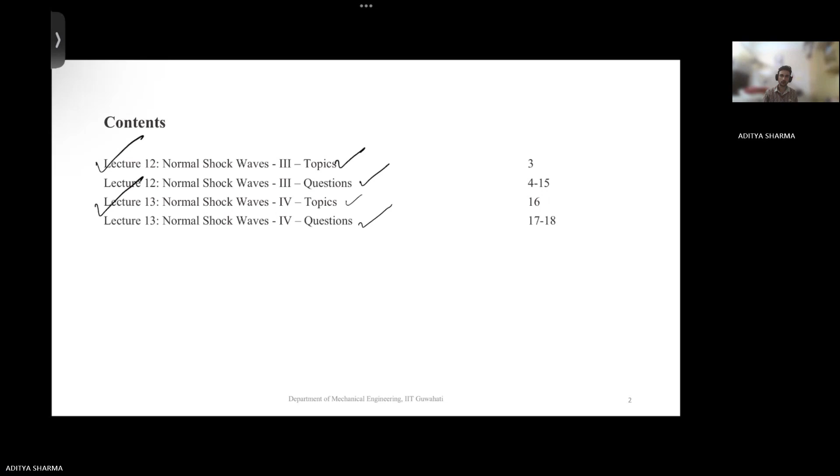So first we have limiting Mach number. It talks about Mach number across your normal shock. What is the limiting value of your Mach number? So in lecture number 12, first is your limiting Mach number.

If your Mach value is too high, in that case your limiting value of M2 is this, for gamma equals to 1.4. So even if your Mach is too high, your M2 value will not fall beyond this. This is the limiting value of your M2, and the formula for that is under root of gamma minus 1 by 2 gamma.

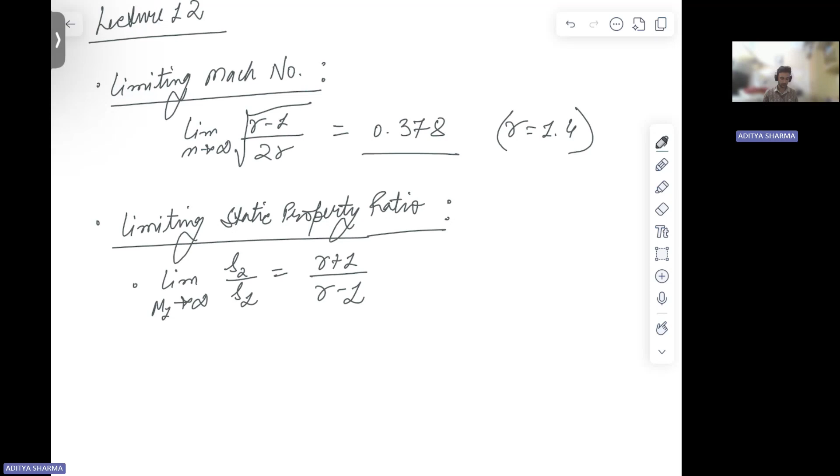So your static density ratio, rho 2 by rho 1, its limiting value is gamma plus 1 by gamma minus 1. And for air, it comes out to be 6. Mach number's limiting value is 0.378, and static density limiting value is 6.

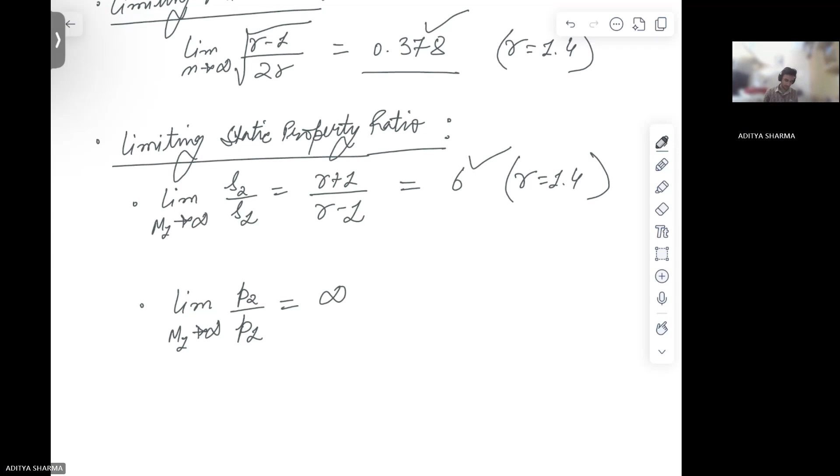Then for your static pressure, this is infinite. So as your Mach upstream of your normal shock is increasing, your static pressure ratio will reach infinity. Same is for your temperature also, your static temperature.

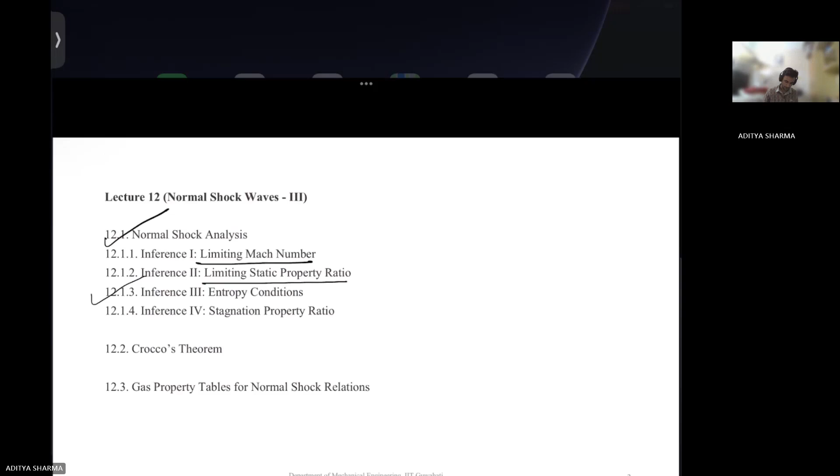Then third is entropy conditions. If your entropy change is less than 0, it means the process cannot happen. Entropy change has to be greater than equal to 0. So this is your entropy change across a normal shock wave. If your entropy change is positive, it means the process can happen. But in the subsonic case, you will see that this entropy change is negative, which means your shock wave will not form in case of your subsonic flow.

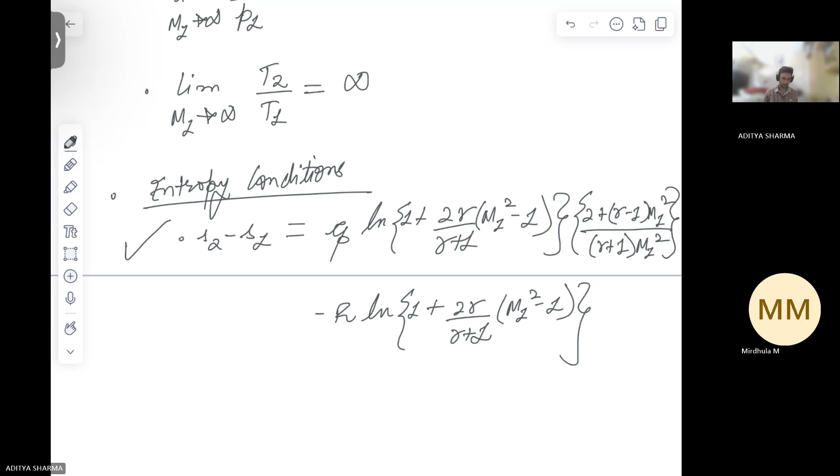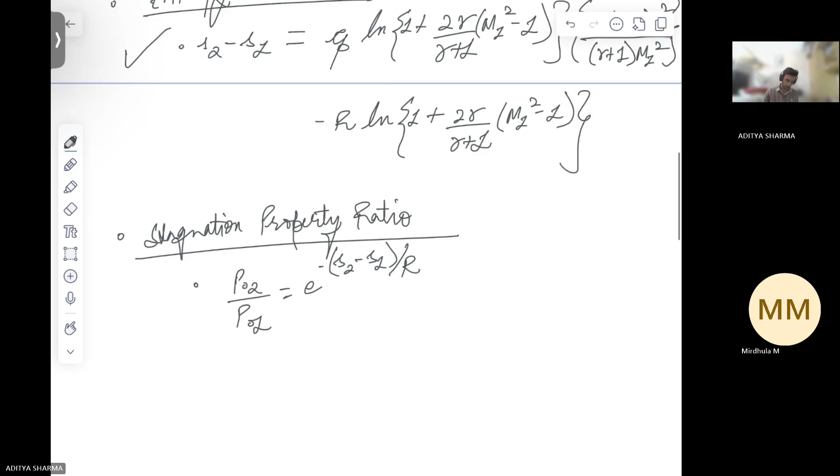Then in your fourth inference, you see stagnation property ratios. For your stagnation pressure, you have this formula. So across the normal shock, what happens to your stagnation pressure? You have pressure loss. In your total pressure, your static pressure rises, but there is loss in total pressure.

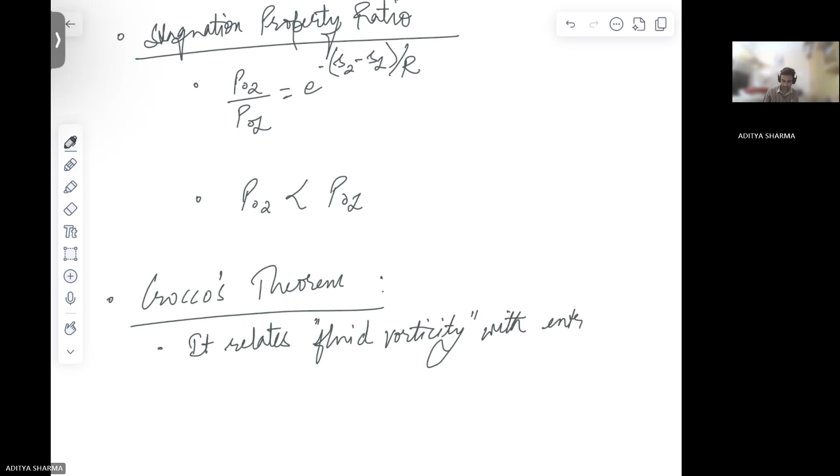So this is about inferences. Then Crocco's theorem has been discussed. Now, what does your Crocco's theorem say? It basically relates your fluid vorticity to your entropy change. So it relates your fluid vorticity with entropy change. It basically says that if there is some change in entropy, in that case your vorticity in fluid will be there, circulation, some type of circulation will be there, rotation, some kind of rotation will be there. And mathematically, it is written this way.

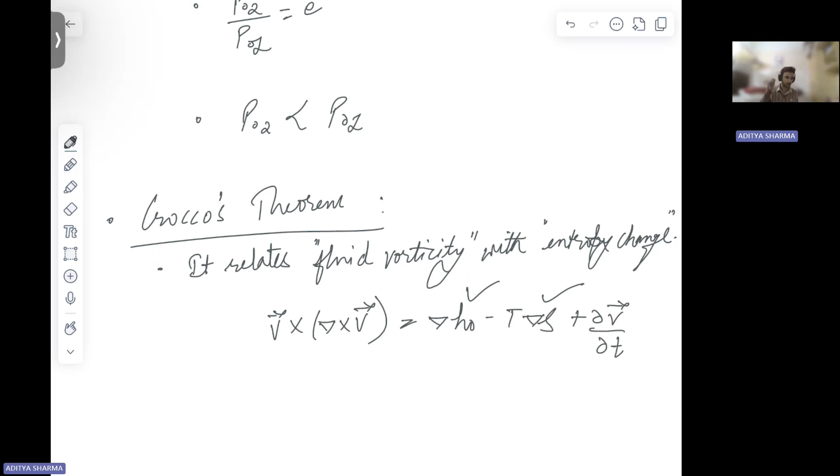This entropy change and enthalpy change, total enthalpy change, so this is your Crocco's theorem. Then gas property tables for normal shock relations, this has been discussed, and there are numericals based on it.

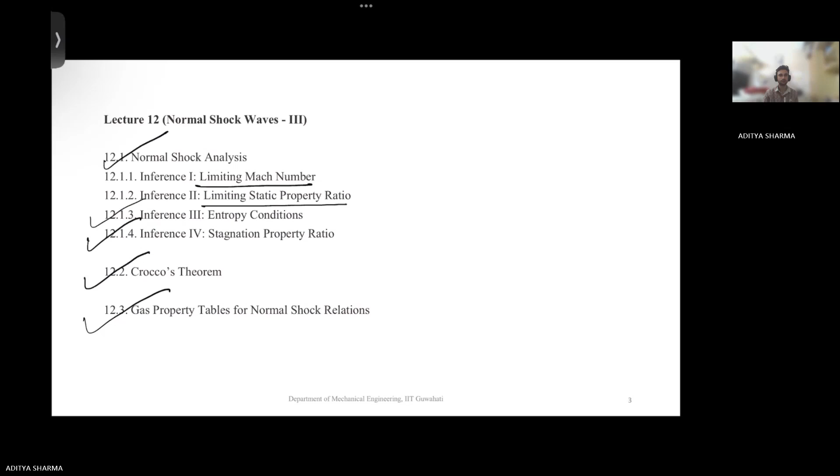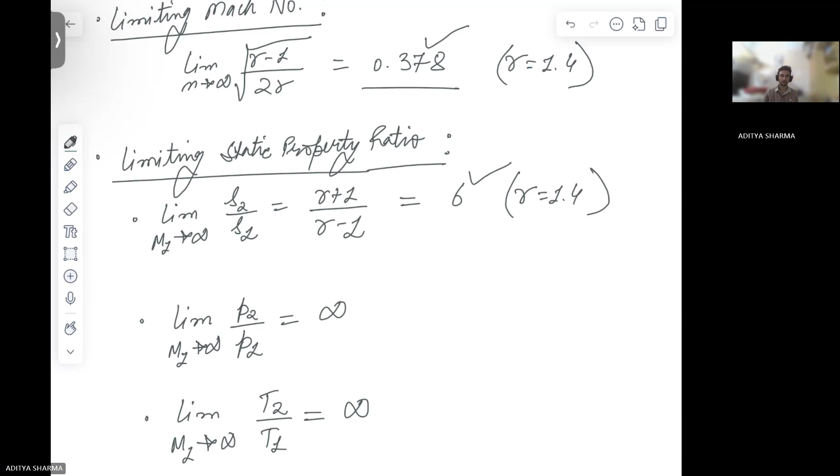So these were topics related to lecture number 12. Limiting Mach number first was, which is under root of gamma minus 1 by 2 gamma. Then limiting static property ratio is there. So for your density, this ratio is 6 with air. For pressure and temperature, this goes to infinity.

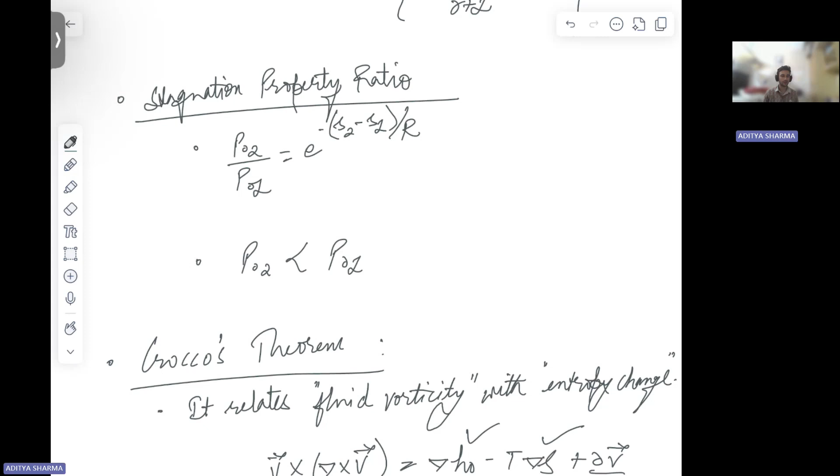Then entropy conditions, this has been discussed. After that, stagnation property ratios, these have been discussed. Then Crocco's theorem has been discussed, which basically relates your entropy change with your fluid vorticity.

Then we have questions. Let's see the questions one by one. So first question is this. Please read the first question and try to answer this question.

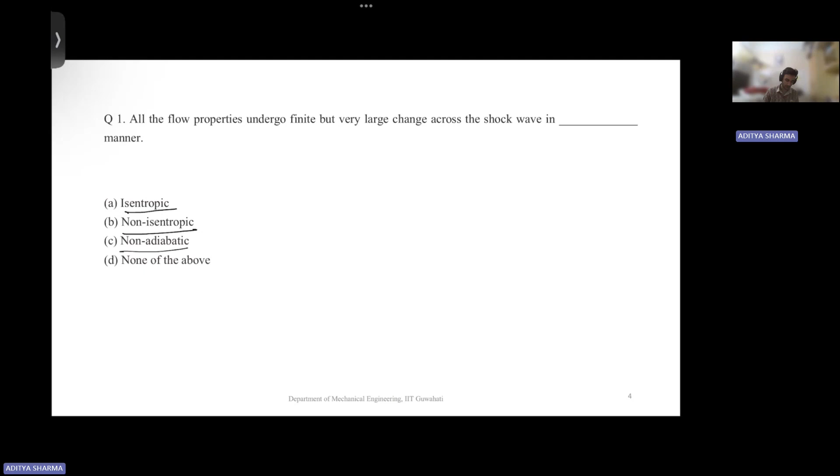So first question is there. It says that all flow properties undergo a finite but very large change across the shock wave in a dash manner. Based on the options, let's see which one is correct: first is isentropic, second is non-isentropic, third is non-adiabatic, fourth is none of the above.

So if you pick up entropy, what happens to entropy across a normal shock? Does it remain the same? Let's see these entropy conditions.

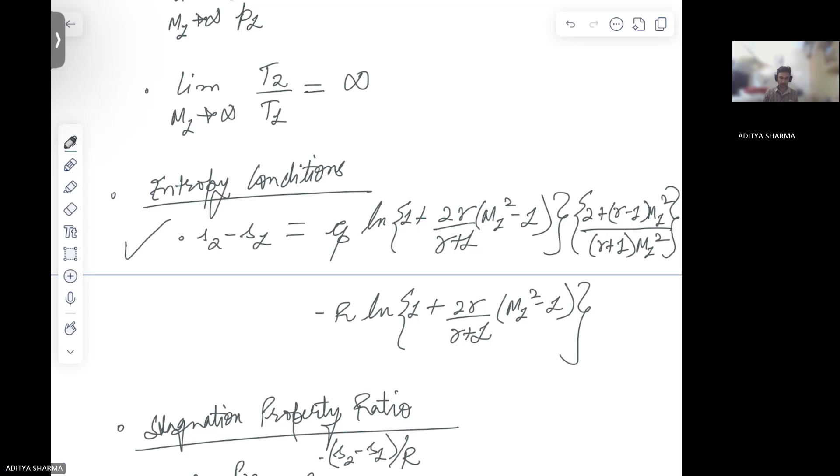For Mach greater than 1, for supersonic flows, entropy is going to increase across the normal shock, which essentially means that across the shock wave, the change is not isentropic. Isentropic means entropy is constant, and for shock waves this is not the case. In that case, B comes out to be the correct answer to this question.

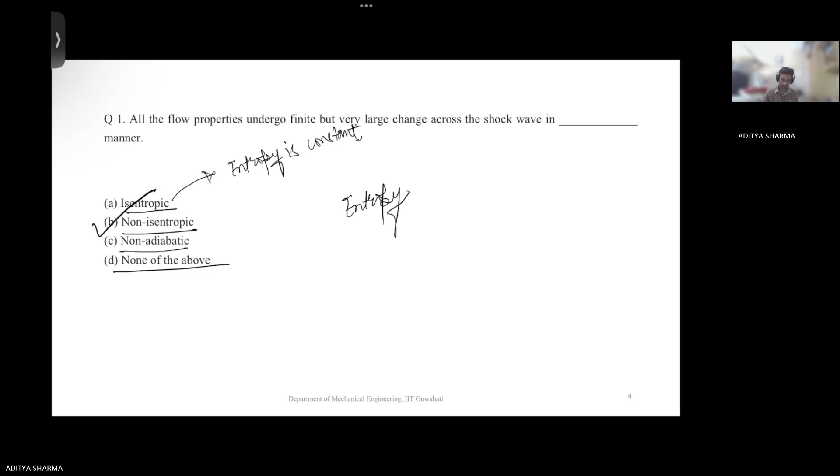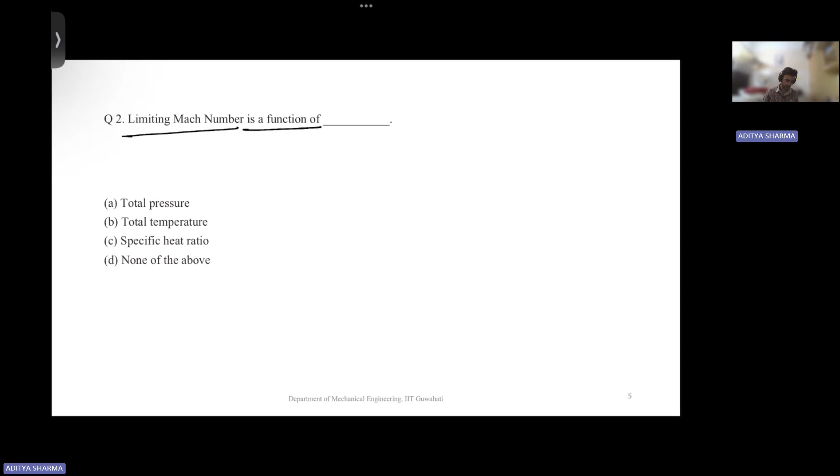Alright, moving on to next question. Question number 2: limiting Mach number is a function of dash. Please try to give an answer: is it a function of total pressure, total temperature, specific heat ratio, or none of the above?

If you see the formula for limiting Mach number, this solely depends on your specific heat ratio gamma. So looking at the options, C comes out to be the correct option, right?

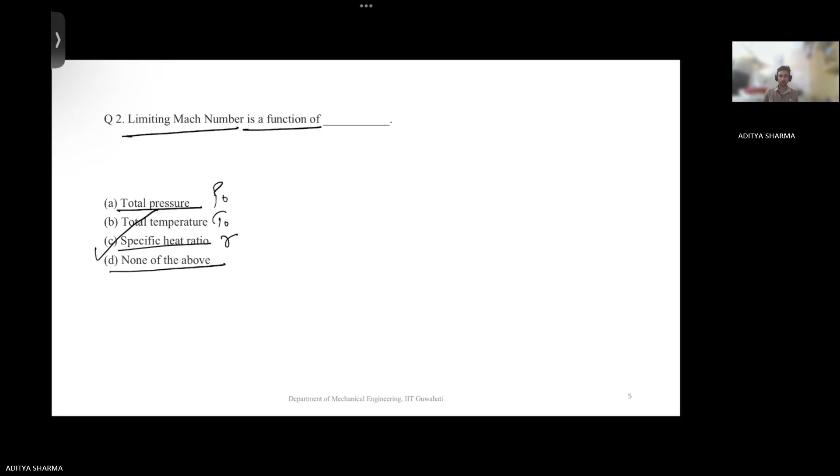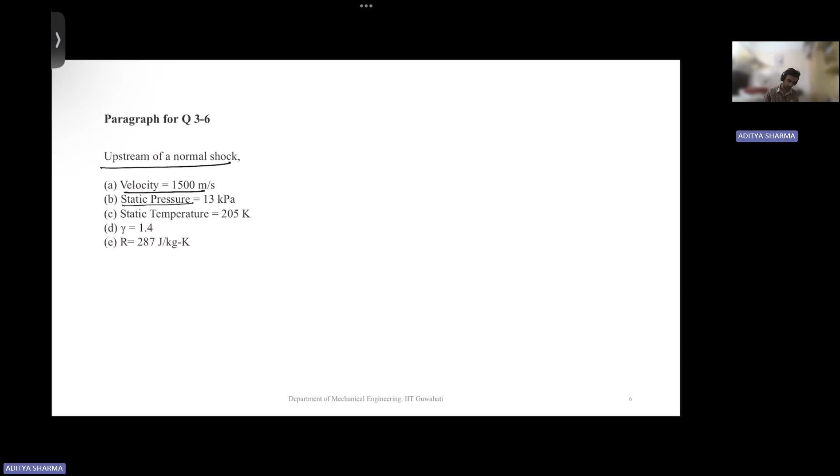Then moving on to next question. This data has been given for question number 3 to 6. It says that upstream of the normal shock, velocity is this, static pressure is this, static temperature is this, gamma is this, R is this. So this information has been given to us for question number 3 to 6.

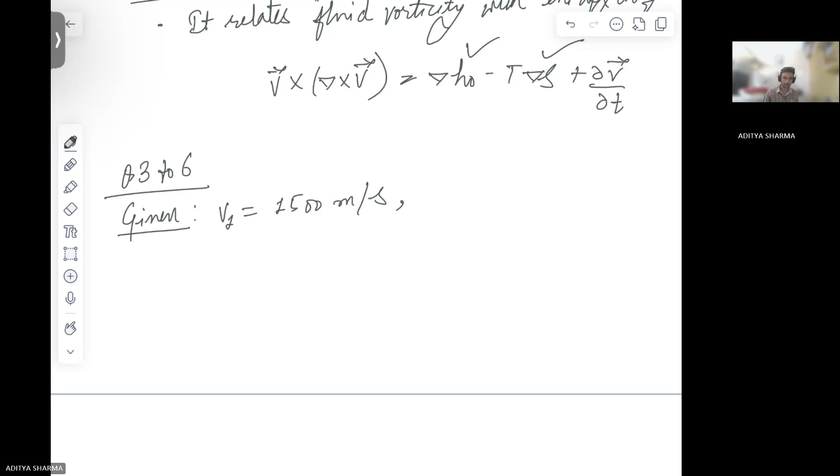V1 is 1500 meter per second. P1 is 13 kilopascal, that is this. Then temperature is 205 Kelvin. Gamma is 1.4. Then R is 287 joule per kg Kelvin.

Now from your Rayleigh relation, okay, here it says find the stagnation pressure downstream of the shock wave. It asks for P02, stagnation pressure. Now we have this relation: P1 by P02 is 2 gamma by gamma plus 1, M1 square, minus gamma minus 1 by...

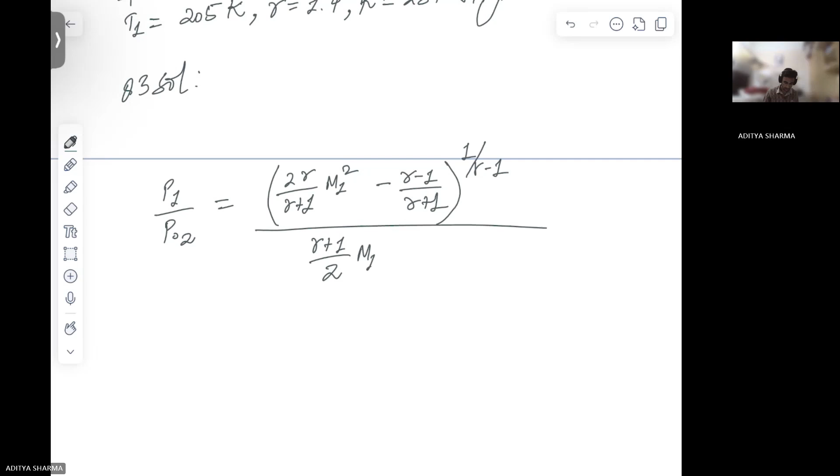So this we have, but now in this relation we want M1. Gamma we have 1.4 given. So to find M1, M1 is V1 by A1, right? Now V1 we have, A1 we need to find out. A1 is square root of gamma R T1, which is 1.4 into 287 into 205. If we work this out, this comes out to be 287 meter per second.

Then Mach becomes V1 by A1 equals 1500 divided by 287. If we calculate this, this comes out to be 5.23. So this is our Mach.

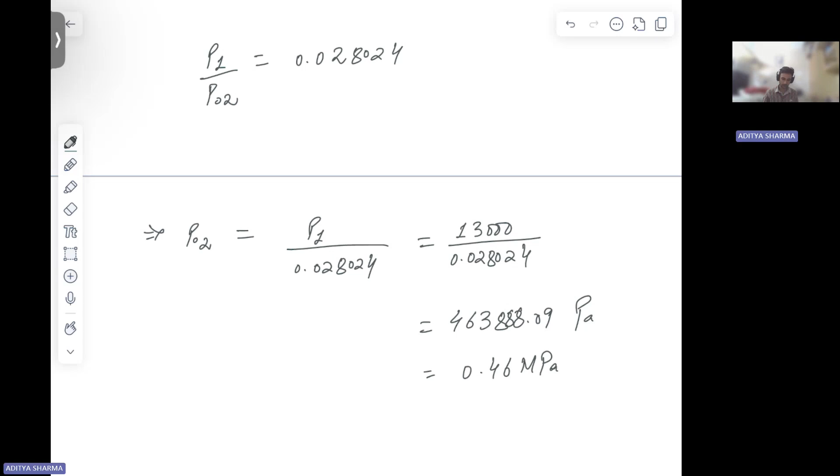Now if you calculate this, this comes out to be around 463888.09. Now if you divide it by 10 raised to power 6, you get 0.46 megapascal. Okay, so this is your answer to question number 3.

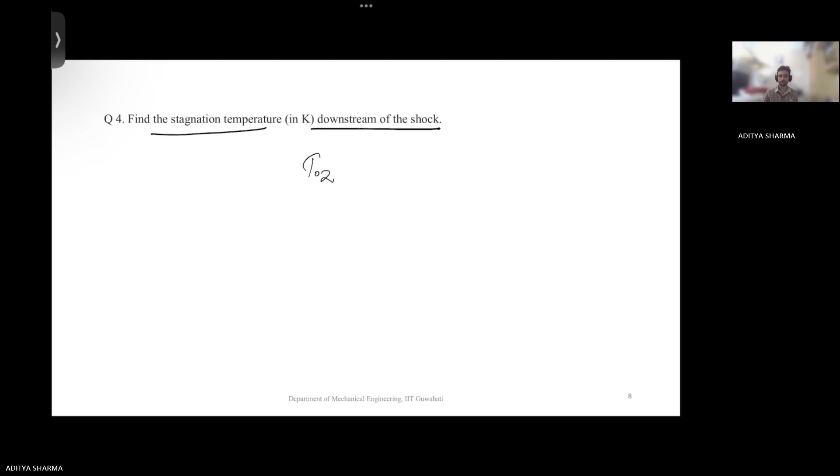Then we have the next question. Let's move on to next question. Find the stagnation temperature downstream of the shock. We need to find out T naught 2, question number 4. Now we know that for normal shock waves, the total temperature remains the same across the shock wave, right?

And from isentropic relations, T naught 1 by T1 is equal to 1 plus gamma minus 1 by 2, M1 square. M1 we have 5.23, we have calculated this. Then for T naught 1, we can write T naught 2, right, and T1 we can take on the right hand side.

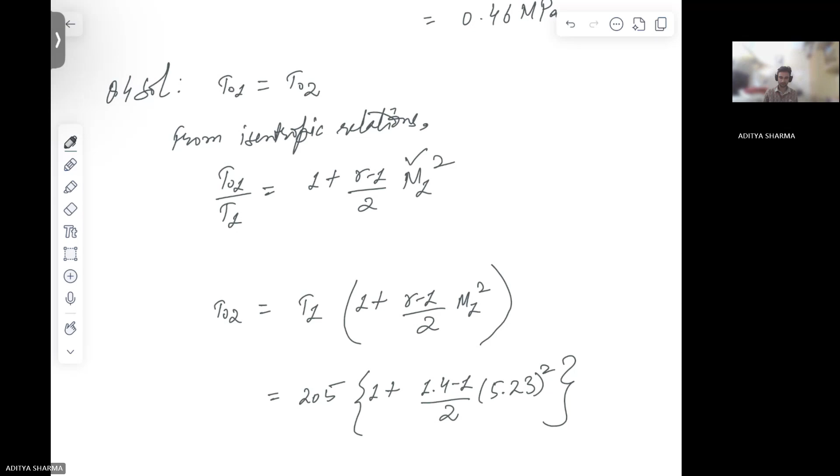Now we can place the values, so this we can do. Now if we calculate this, please calculate this, let's see what the answer comes out to be.

So this comes out to be 1326.46 Kelvin. So this is your total temperature.

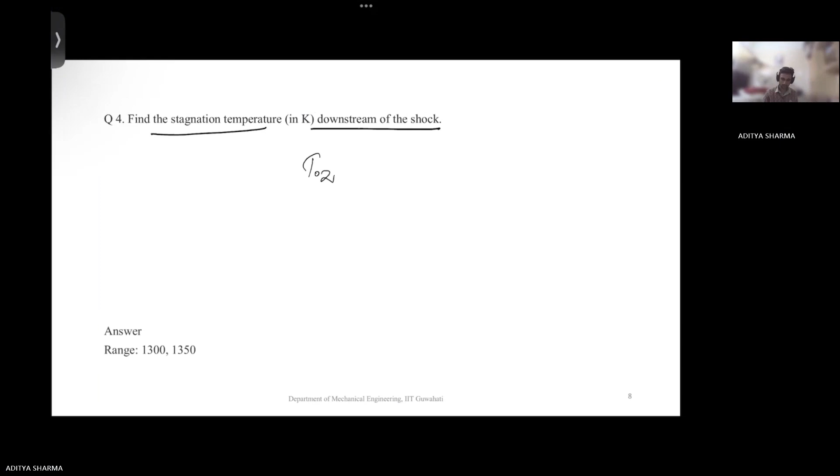So which relation should we be using to find out P2?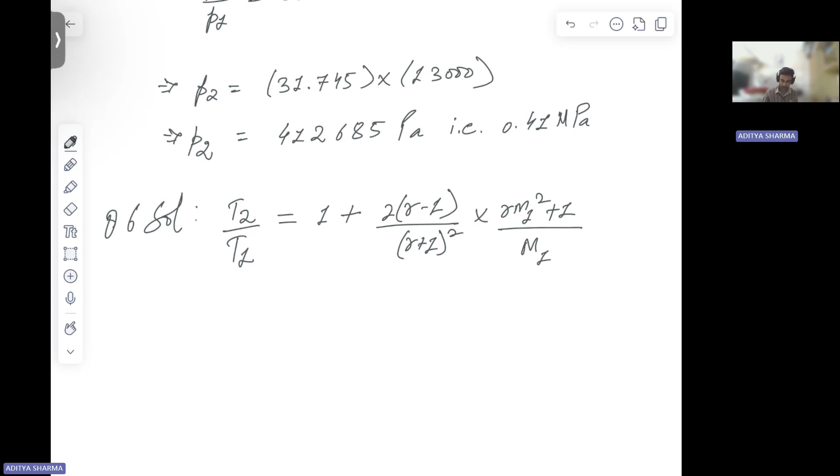So this is the relation that we are going to use: T2 by T1 is equal to 1 plus 2 gamma minus 1 by gamma plus 1 square, into gamma m1 square plus 1 by m1 square, into m1 square minus 1. So this is the relation that we are going to use.

Now placing the values, this is 2 into 1.4 minus 1 divided by 1.4 plus 1 square, into 1.4 into m1 is 5.23 square plus 1 divided by 5.23 square, into 5.23 square minus 1.

So this is this. This is 0.8 divided by 2.4 square into 1.4 into 5.23 square plus 1 divided by 5.23 square. Now please calculate this.

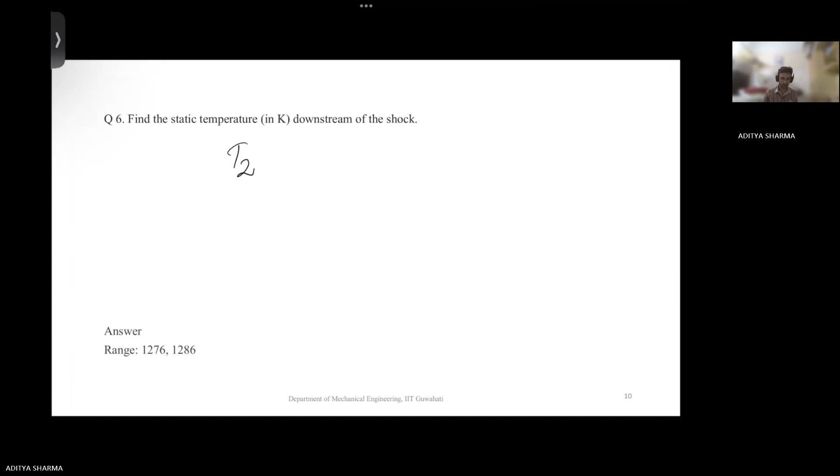Okay then, moving on to next question in that case. So this is the next question. So please read this question and try to answer this question. Then I'll discuss this.

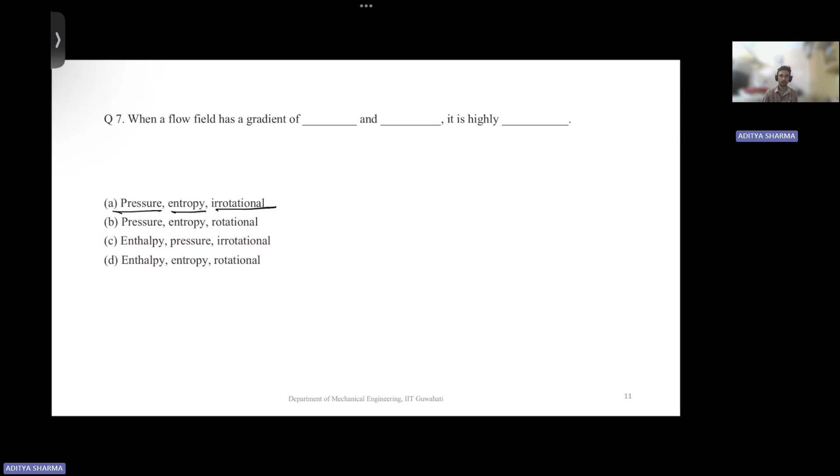Okay, so this question says that when a flow field has a gradient of dash and dash, it is highly dash. So four options are there. The first option says that when there is gradient of pressure and entropy, it is highly irrotational. So rotationality - where it has been discussed - that we need to recall. So second says pressure and entropy, and third option is rotational.

Then third option says enthalpy, pressure, and irrotational. Then your fourth option says enthalpy, entropy, and rotational.

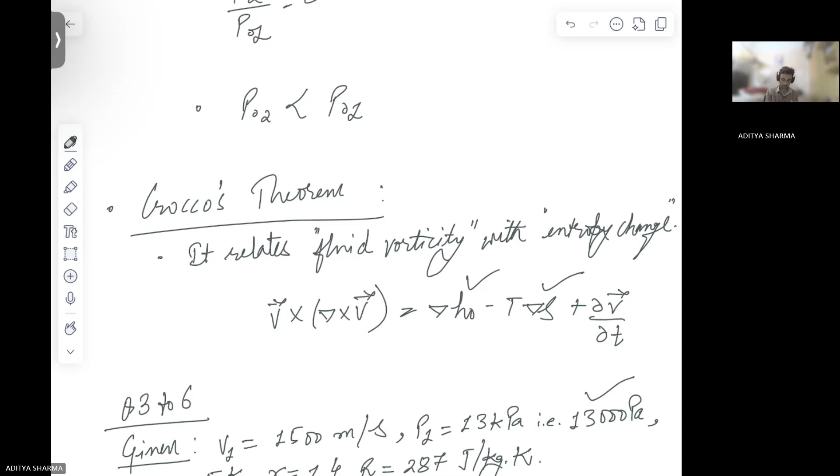So now I'll go back to Crocco's theorem. So what does your Crocco's theorem do? So if you see the mathematical expression of Crocco's theorem, there is change in your enthalpy and then there is change in your entropy. And this is related to the rotationality of the flow across the shock wave.

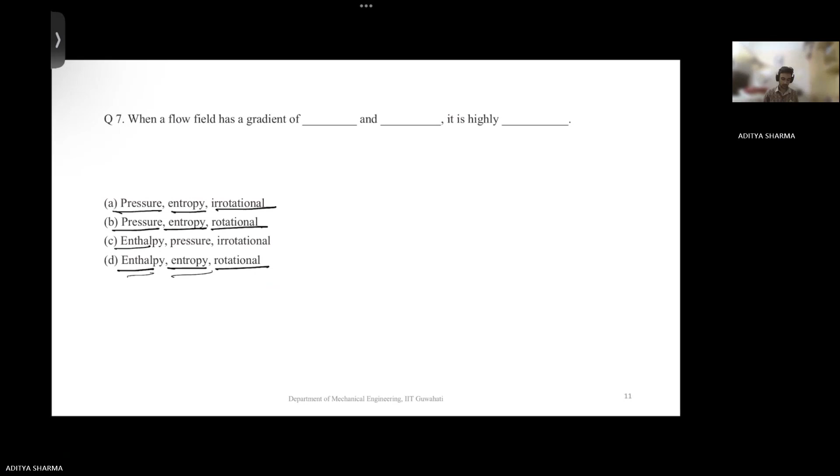So looking at this, if we see our options, if you see the D option, we have enthalpy here also, we have entropy also. So there are gradients of enthalpy and entropy in the expression of Crocco's theorem, which leads to rotational behavior of the flow. So this is question number 7. D is the correct answer to this question.

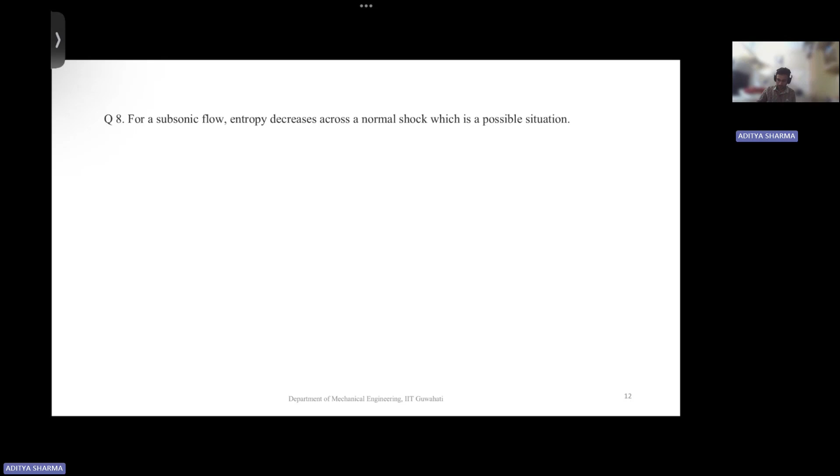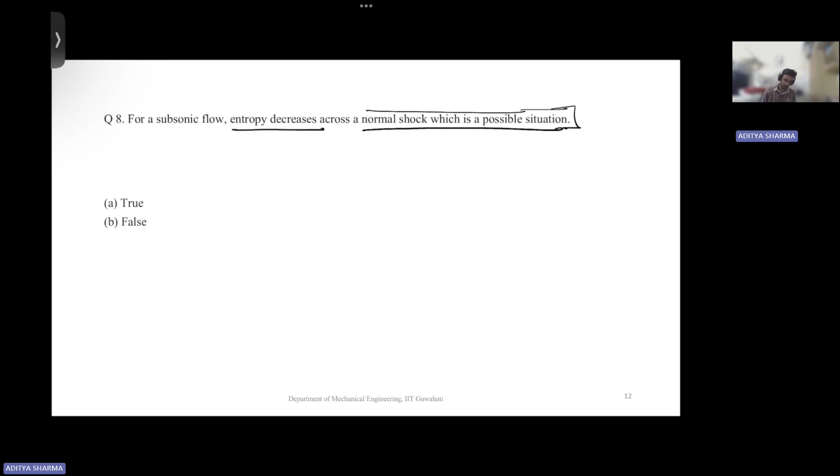So next question we have. So this question says that for a subsonic flow, entropy decreases across a normal shock, which is a possible situation. So this is what I was discussing, that entropy cannot decrease. So if entropy is decreasing, this means that this situation cannot take place. So in that case, this becomes a false statement, B option.

So this is question number 8. Then we have next question. So this is from your lecture number 12 only. So we're just revising these numericals.

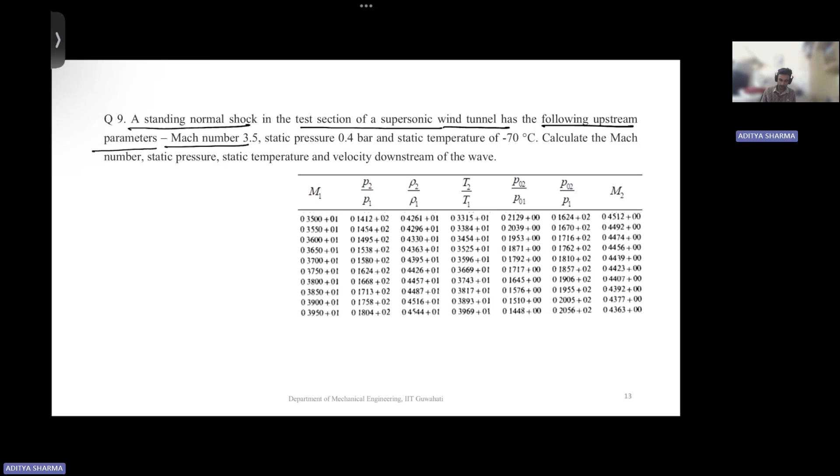So is standing normal shock. Now we know what is a standing normal shock, right? There are two types of shock waves: one is moving shock wave and one is standing, like we get in a wind tunnel. So standing normal shock in the test section of a supersonic wind tunnel has the following upstream parameters. So Mach is given 3.5, static pressure is given this, static temperature is given this. Calculate the Mach number, static pressure, static temperature, and velocity downstream of the wave.

Also, we have given this table. This gas dynamics table has been given to us. For your 3.5 Mach number, you have P2 by P1, rho 2 by rho 1, T2 by T1 - the ratio of static properties - then stagnation property, P naught 2 by P1. So we have seen the formula for all these. Then M2 is also there.

So Mach, it says, now Mach is directly here, 0.4512. For static pressure, so we have been given P1 and P2 by P1 we can get from table, and then P2 we can get. Similarly, T2 by T1, T1 is given to us. T2 by T1 we can get from table, and further we can get T2. Then velocity downstream of wave. So velocity also can be managed. So let's see this question.

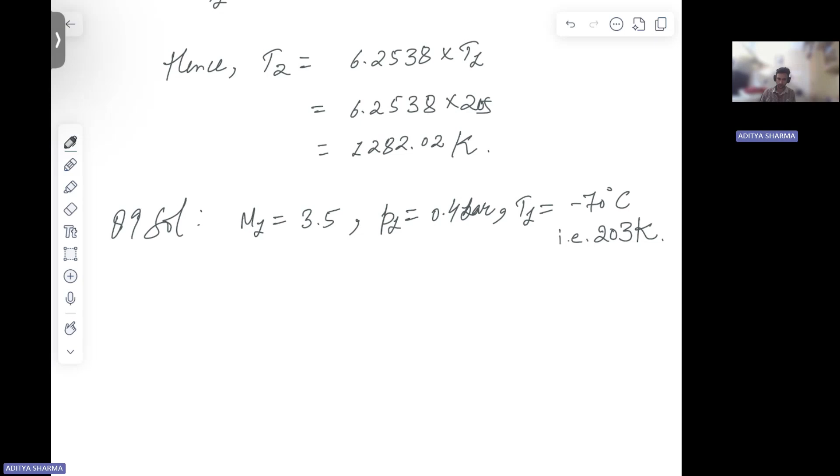So now M2 from table, M2 is 0.4512.

Now P2 by P1 is given as 14.12, this is given. So P1 we have, P2 we can calculate.

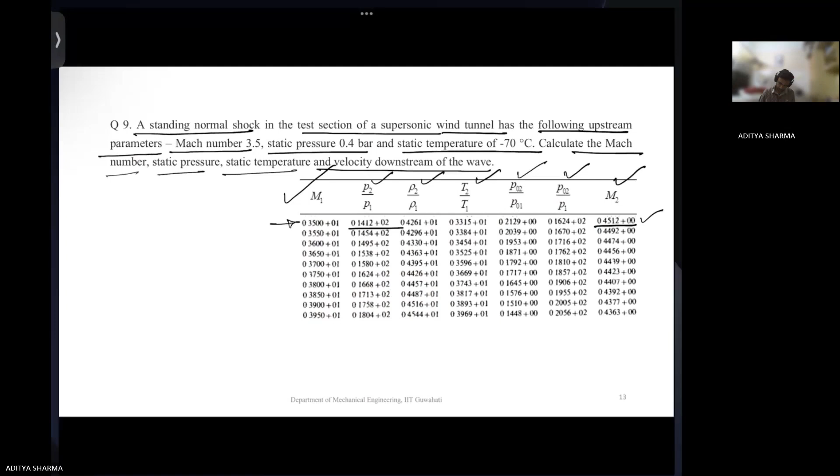So please calculate this. So this will come out to be 5.648 bar. Okay, similarly, T2 by T1 is 3.315.

Implies T2 is equal to 3.315 into T1, which is 3.315 into 203. So calculate this. So this comes out to be 672.94 Kelvin.

Okay. Then pressure we have calculated, static temperature we have calculated, Mach we have, now velocity downstream of shock wave.

From the definition of Mach number, so this we can write, gamma is 1.4, this is 672.94. So calculate this. So this comes out to be 234 point... meter per second.

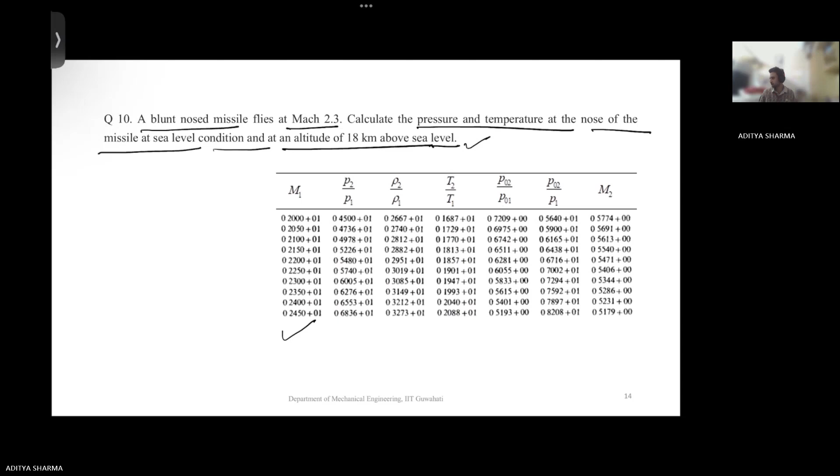So here also we need to calculate it, do this question using a gas dynamics table. But then also the information here that is, I believe, missing is that at 18 kilometers above sea level, we don't have the pressure and temperature. Okay. So this question has been plainly put, right? But if such type of question comes in exam, so how to calculate the pressure and temperature at 18 kilometers of altitude, this will also be given, right?

So in our initial semesters, when we study aerospace engineering, so this we are taught, okay? So how the pressure, how the temperature changes with altitude. So pressure and temperature has been asked. Yes. This is question number 10.

So first of all, at sea level, we have P1 is equal to 1 bar and T1 is equal to 15 degrees Celsius. That is this. So maybe we can call it sea level, sea level.

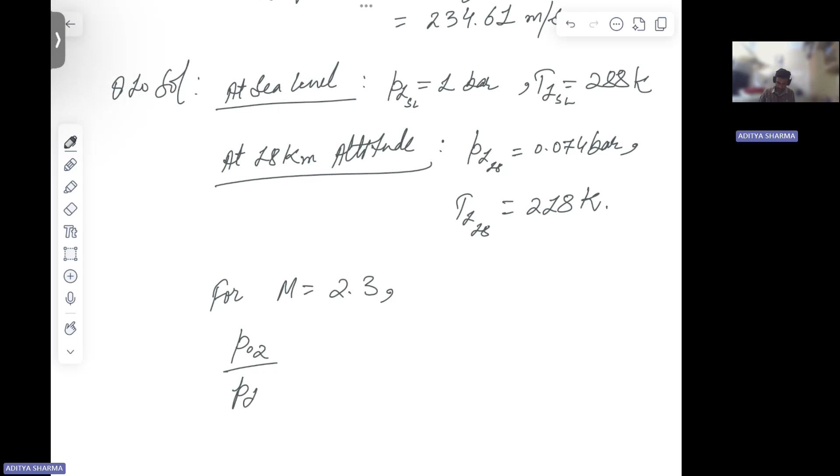Now, if you see here, so this is the 7.294. So for Mach equals to 2.3, P02 by P1 is 7.294. Okay.

So P02 at sea level will be equal to 7.294 into P1 at sea level. So this is 7.294 into P1. So P1 is 1 bar. So this will be 7.294 bar. Right?

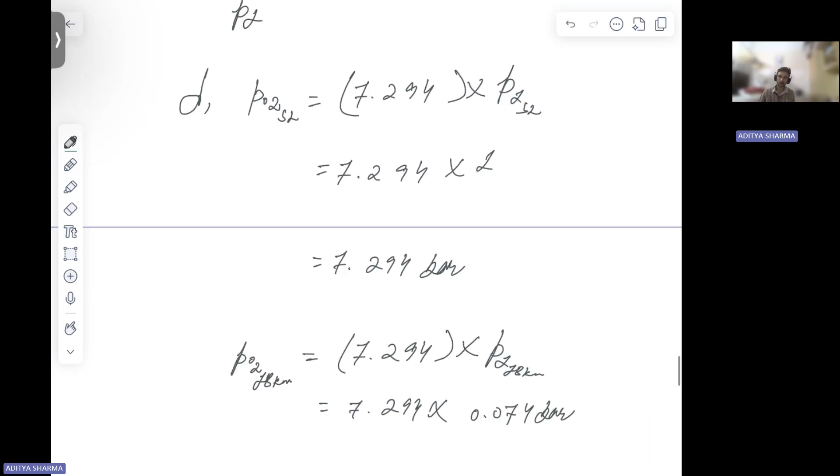Then P02 at 18 kilometers, if you see, so this will be 7.294 into P1 at 18 kilometers. So this is 7.294 into 0.074 bars. So you see, as we are moving up in the altitude, okay, from sea level, so your pressure, static pressure decreases, correct? So if we calculate this, this will come out to be... so this is 0.53 bar total pressure.

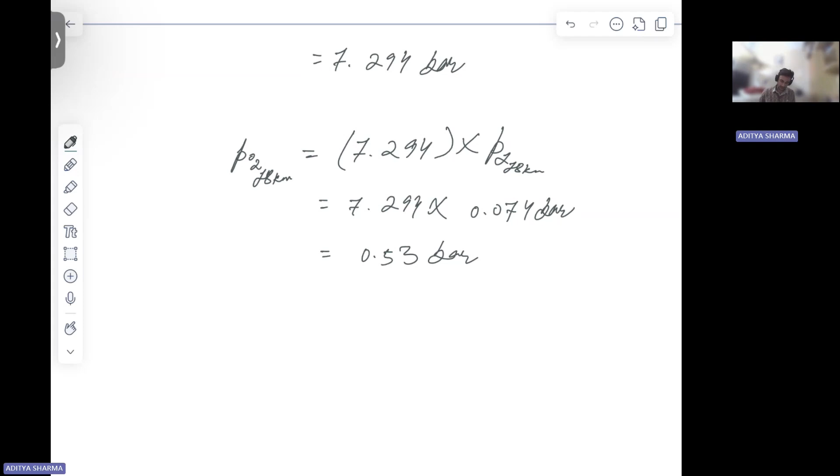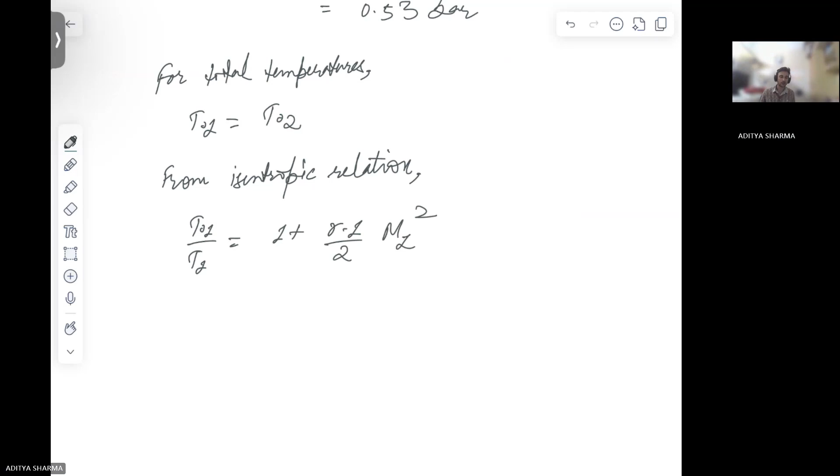Now regarding the total temperature, so first of all, because the total temperature does not change across the normal shock, so this is there. Then from isentropic relation, so this is there, right?

So your T02 then becomes, for first of all, for sea level, T1 at sea level into 1 plus gamma minus 1 by 2 m1 square. So m is same. T1 is 288. 1 plus 0.4 by 2, 2.3 square. 2.3 only, I believe. Just 2.3 square.

So if you work this out, this will come out to be 288 into 2.06 and 593.28 Kelvin. Now similarly,

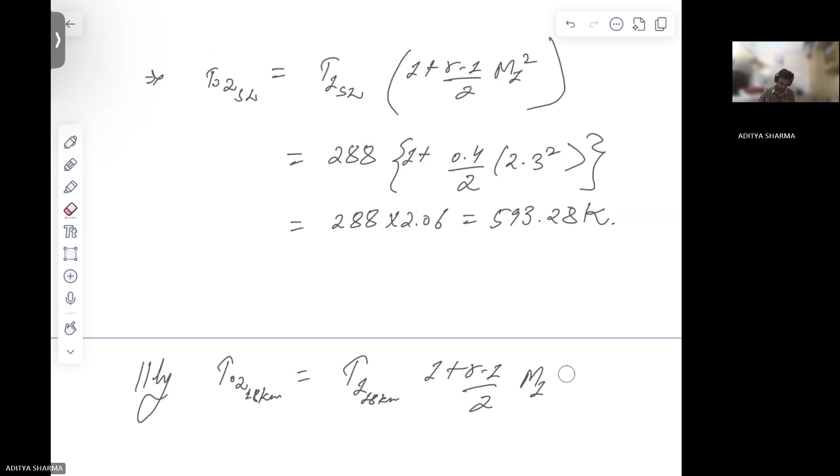T02 at 18 kilometers altitude will be T1 at 18 kilometers altitude, gamma minus 1 by 2 m1 square. So this is going to remain same. This part is going to remain same. Okay, so only thing that is going to change is this T1.

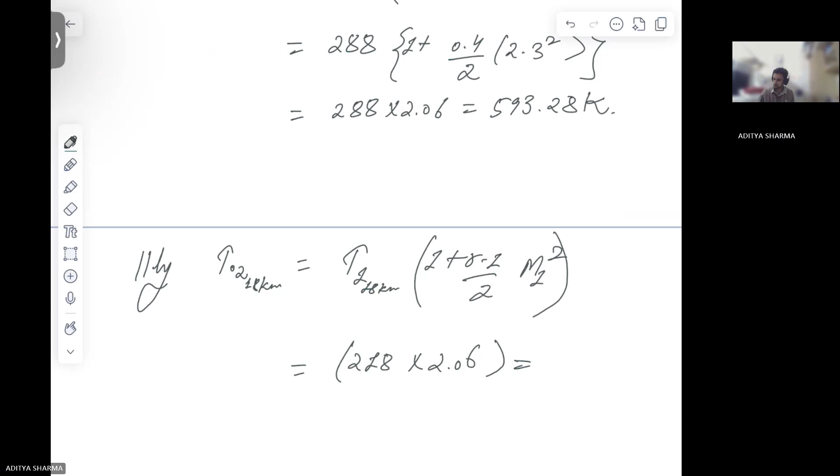So this is 218. This is 218 into 2.06. So if you calculate this, so this will come out to be 449.08 Kelvin.

So this is there. Then next question is there.

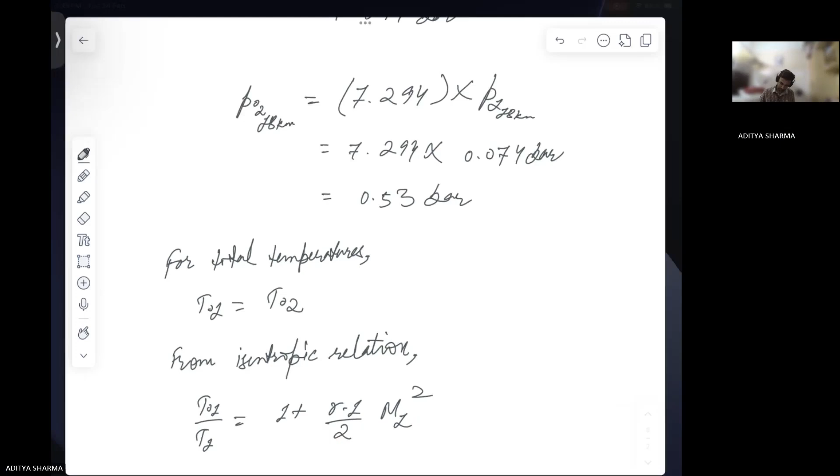This is 7.29 bar, 0.53 bar, 593.28 Kelvin, 449.08 Kelvin. So this is there.

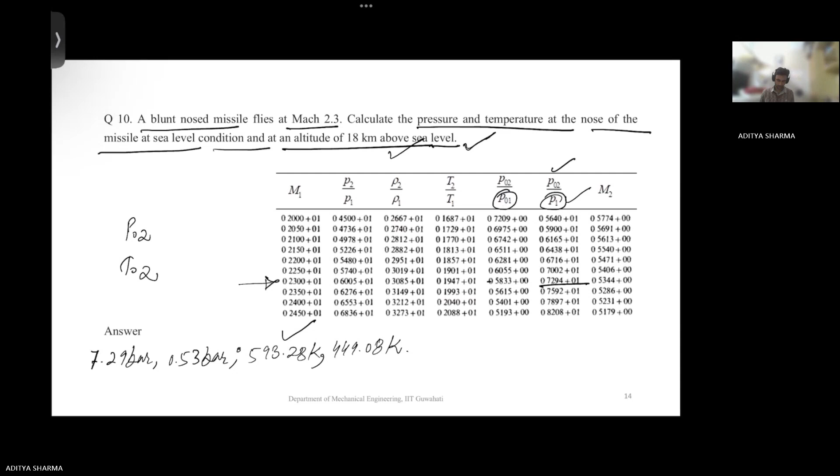The next question is, a pitot probe inserted into supersonic flow field measured 3 bar pressure while static pressure in the flow field was given. Calculate the Mach number at this point. What will be the entropy change across the flow field? So this has been asked.

So P02 has been given to us. P1 has been given to us. Based on this, we can have this P02 by P1 ratio. And from here, we can estimate what will be our upstream Mach number, M1. Okay.

Also using this, we can relate this ratio to P02. Okay. So from P02 by P01, we can get the entropy change because P02 by P01, sorry, is there in your formula for entropy change.

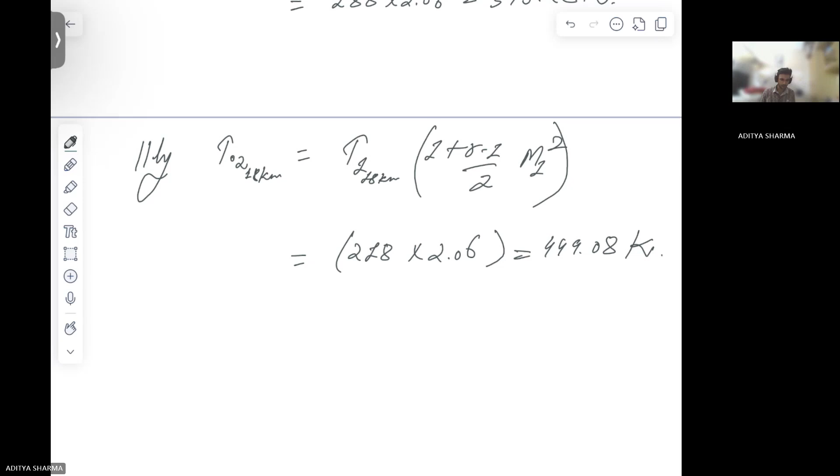So P naught 2 by P1. If we do this, so this is 3 by 0.4, which is 30 by 4. So this will come out to be around 7.5.

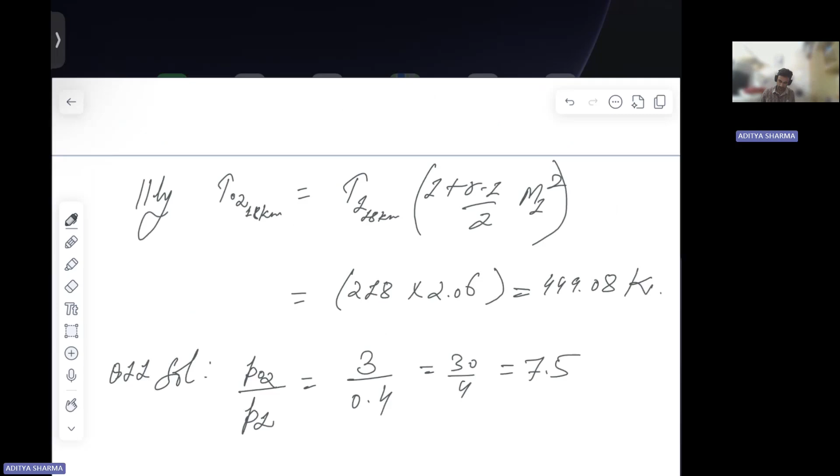Now if you see this table, 7.5 for P naught 2 by P1 comes at this. Corresponding to this, we have P naught 2 by P1, and Mach is 2.35. So Mach is 2.35, and your P naught 2 by P naught 1 is 0.5615.

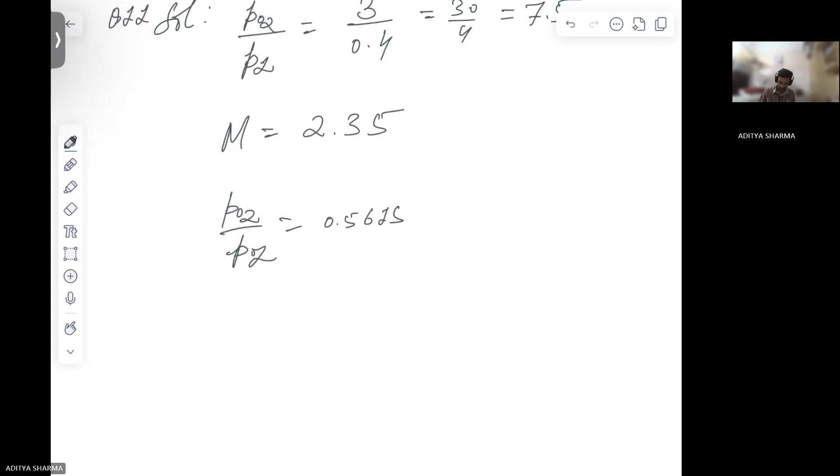So here, change in entropy S2 minus S1 is minus R ln of P naught 2 by P naught 1. R is 287, ln. If you calculate this, this will come out to be... so this is question number 11: 165.6 joule per kg Kelvin.

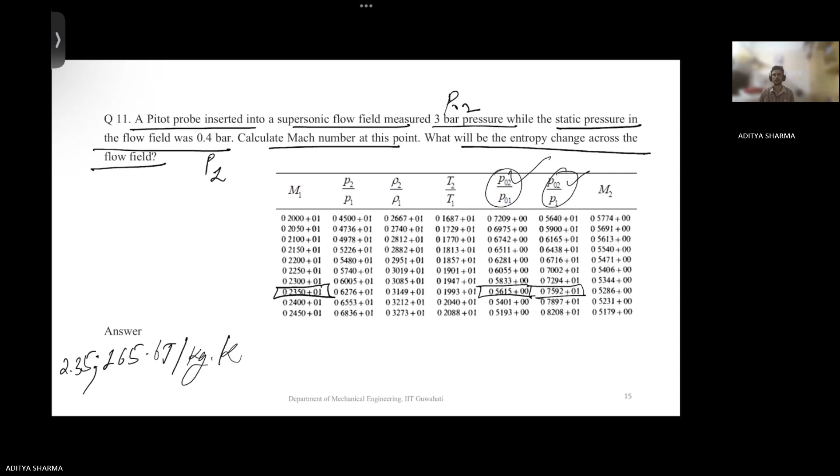Also, 2.35 is your Mach. So this is your question number 11.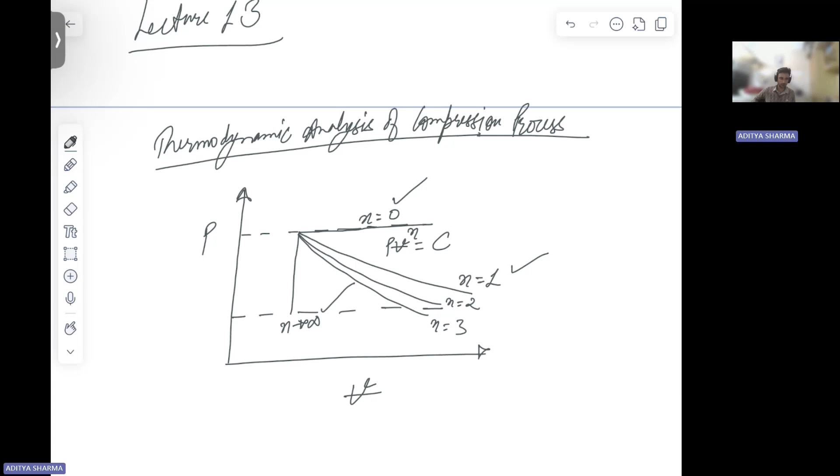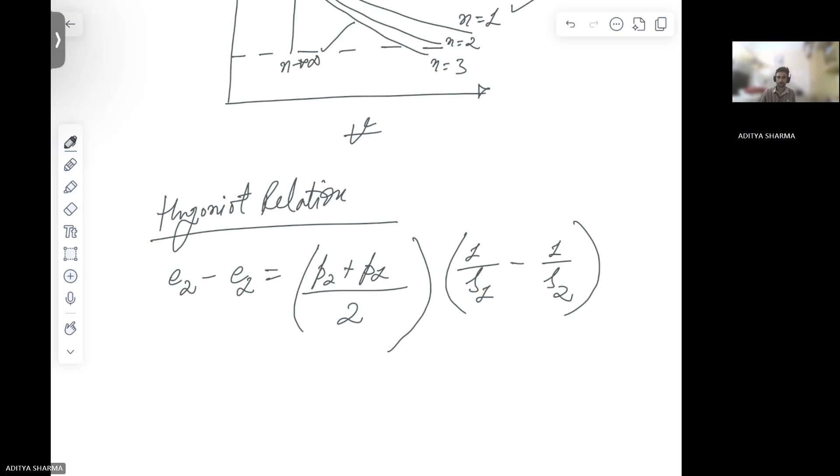Then the Hugoniot relation has been discussed, which basically links your internal energy to your pressure and density. So it is like this. Also, the ratio of your static pressures has been given, and this is specific volume.

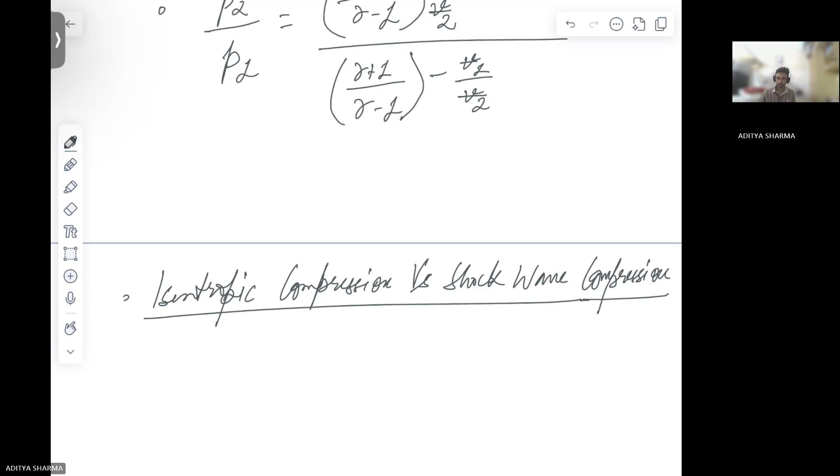Then one more topic has been discussed, which is isentropic compression versus your shock wave compression. Your shock wave compression is shown by the Hugoniot curve, and then your isentropic curve is shown.

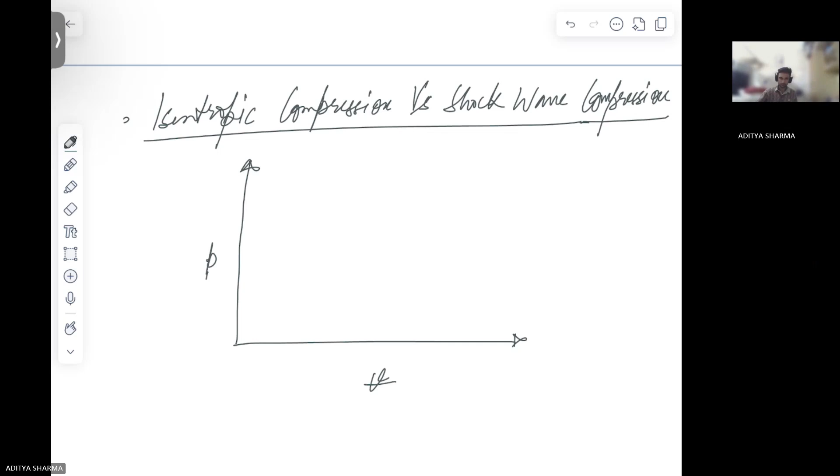So if we see the graphs, it is something like this. This is your Hugoniot curve, this is your isentropic curve. So now this is 1, this is 2. Now if we see the specific volume decreasing, let's call this point 2 dash and this is 2.

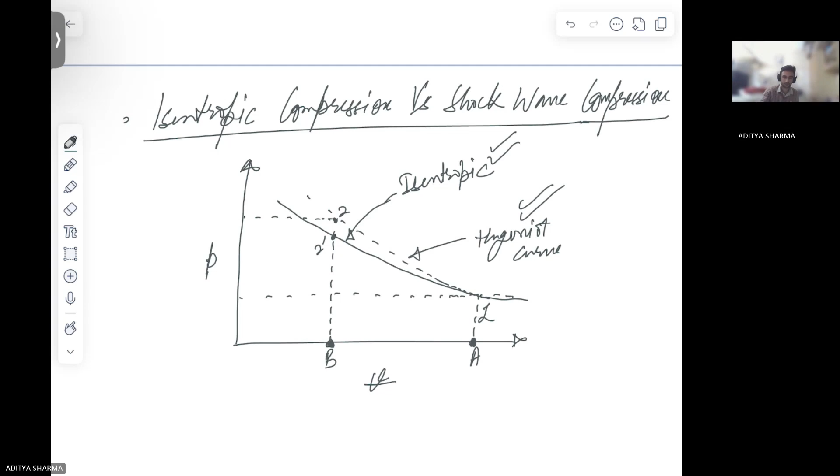So this is it about your lecture number 13. Then there are 2 questions based on this lecture.

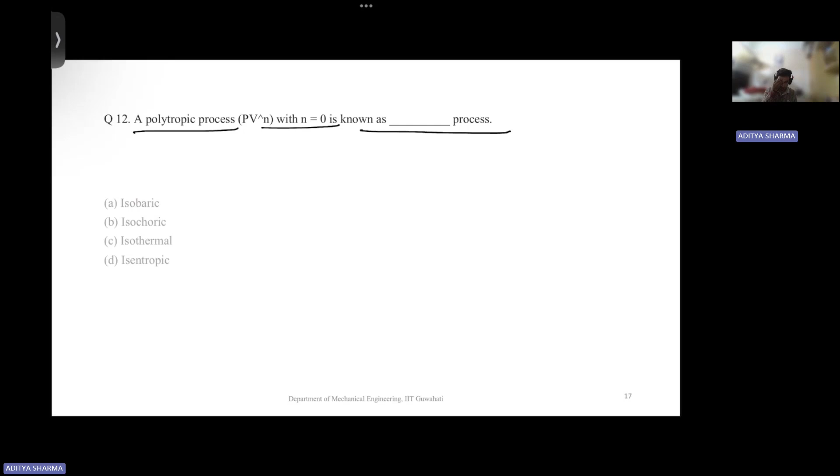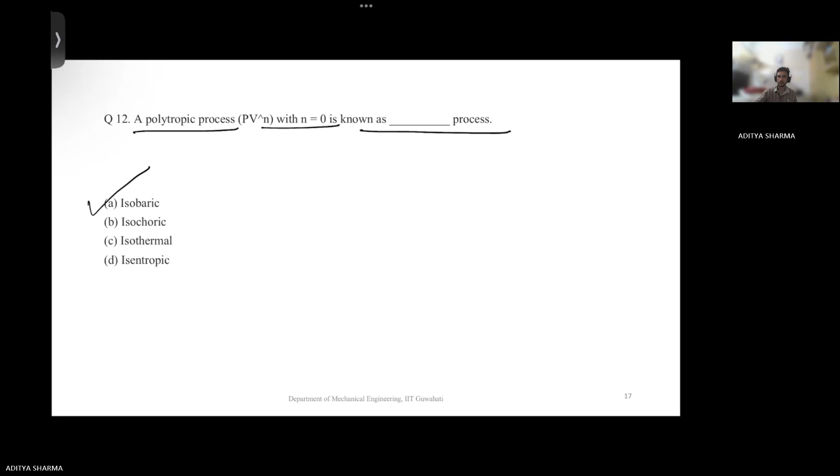First: a polytropic process with n equals to 0 is known as dash process, with 4 options given. When n is equal to 0, if you see this graph, it means your pressure is remaining constant. What do we call this process? We call it isobaric process, right, your pressure remaining the same.

So this is it about today's session. I'll just conclude. There were 2 lectures, lecture number 12 and 13. This was a continuation of the previous week's content where we did modeling of shock waves, and then saw properties change across the shock wave.

Then in the normal shock wave analysis, what we saw is inferences based on the previous discussions, and then some limiting cases of the normal shock wave - be it your Mach number or your static property ratios. Then one important theorem, Crocco's theorem, we saw, which tells about the rotationality of the flow in case of entropy change and enthalpy change, for which an expression was introduced.